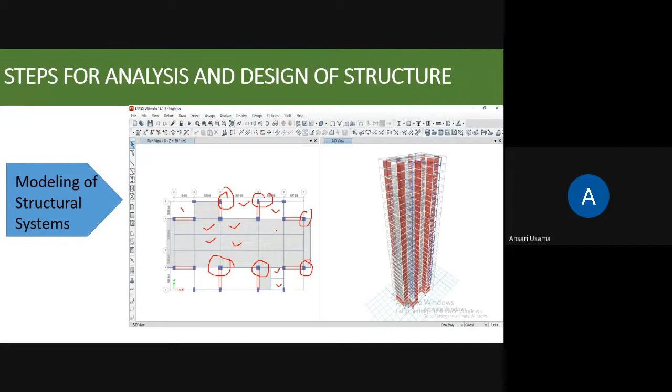So because that portion is open to the sky, we are not providing the slab over here. So this is how we have to prepare the model first of all. After the preparation of the model, the next step is we have to define the material property, which material we are going to use.

Since here we are going to learn about the design of RCC structures, we have to define two materials: one is concrete and another is steel. You might know that different grades of steel are available, Fe415, Fe500 and Fe250 as per Indian Standard Code. So we have to define the material. This kind of window will open when we go for the material property data.

You have to define the material, like concrete, what grade of concrete we want to use for the design of a structure, and similarly we have to define the steel grade, which grade of steel we want to use for the design of a structure. That is how we define the material property.

After defining the material property, we have to define the preliminary size of the sections, what will be the size of the column and what size of beam we can provide for a building or structure. So it is a preliminary size. It is not a final size.

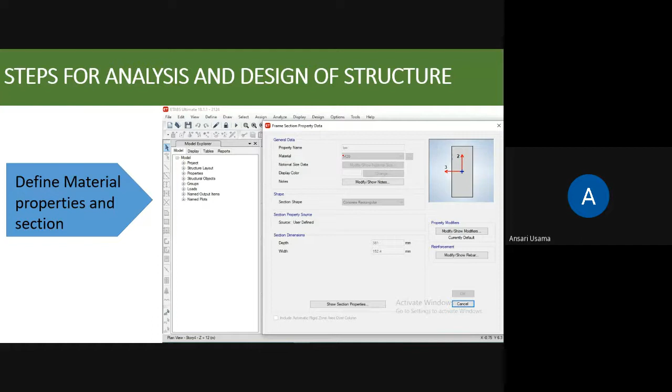After defining the material properties and sections, we have to define the support. Generally, we provide a fixed support, but if we are doing the analysis of a steel structure or a truss geometry, we have to define the support as a pin joint, or hinge or roller supports. But when we are designing an RCC building, we treat supports as fixed, rigid supports.

So we'll define the support and then go for the analysis. Before the analysis, we have to apply the load on each and every member. For example, on a beam element there are wall loads. Similarly, the slab load will transfer by defining the slab, so it is already there.

So we have to define the live load over the slab panel and the wall load on the beam element, various kinds of load. If we want to do the analysis for wind loading, we have to define the wind load. And if we want an earthquake resistant design of a structure, we have to define the earthquake loading also. So different loads are defined under the head of loading.

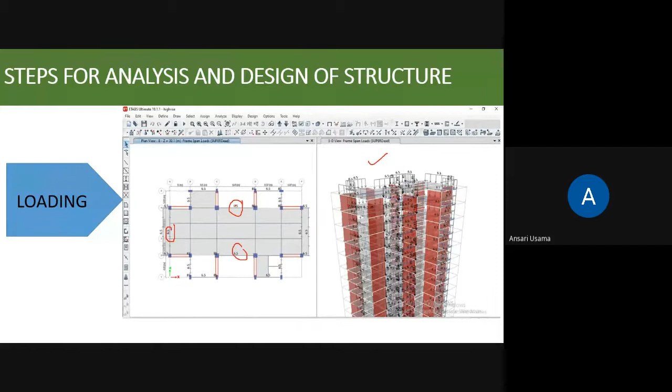Once we apply all the loads coming over this structure, one more load we have to define here is the self-weight. This software directly takes the dead load, but in the case of STAAD Pro, you have to assign the dead load also. Here, the software will directly take the dead load, the self-weight of the structure. After the loading step is completed, we go for the analysis.

You might have studied different methods of analysis in your analysis subject, like moment distribution method, flexibility method, stiffness matrix method, slope deflection method. Here the software will do the analysis on its own, and mostly these softwares work on the stiffness matrix method. Almost all the design softwares work on the stiffness matrix method.

So here you don't have to do any kind of analysis. The software will do the analysis. You just have to click on the run analysis button, and your software will do the analysis. And what do we want from the analysis? What output do we want from the design point of view?

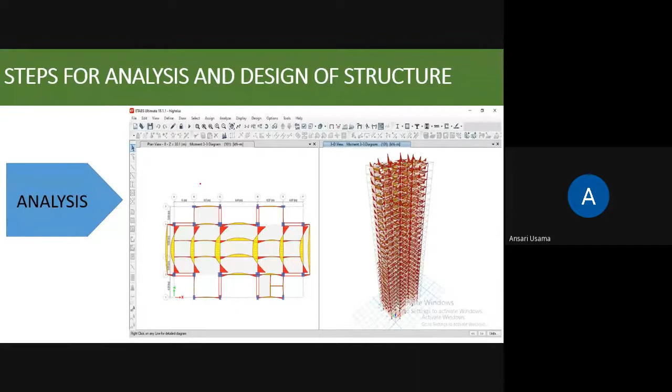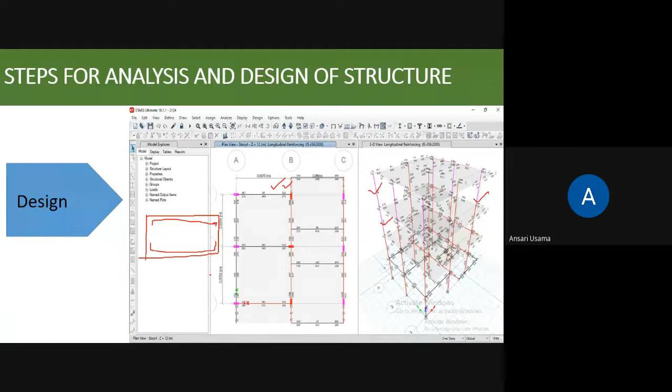So this is all about the brief introduction of the ETABS software, how we can do the analysis and design of any structure, starting from the modeling till the design, the various steps. Okay, so this is just a brief introduction about the ETABS software. Now we'll see how we can run the ETABS software and what the icons of the different versions of ETABS look like.

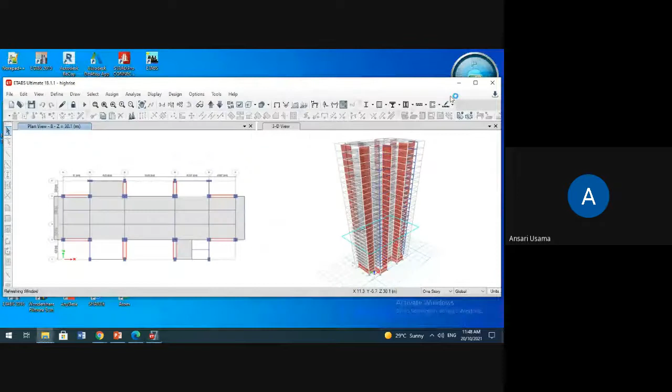So the desktop window is visible to you. As we have discussed, different versions of ETABS software are available in the market. You can take any one of them. There is some change in each and every version. Similarly, the icon symbol also changes from version to version.

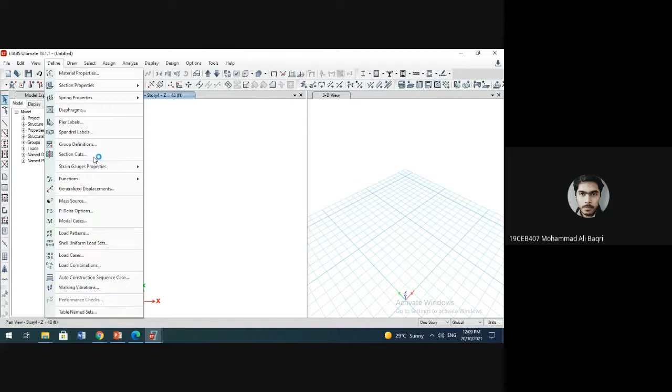See that so many sections are available under this window. Similarly, when we see the loading, load cases, the various load cases are available from the last project that you have done. The various load combinations are there.

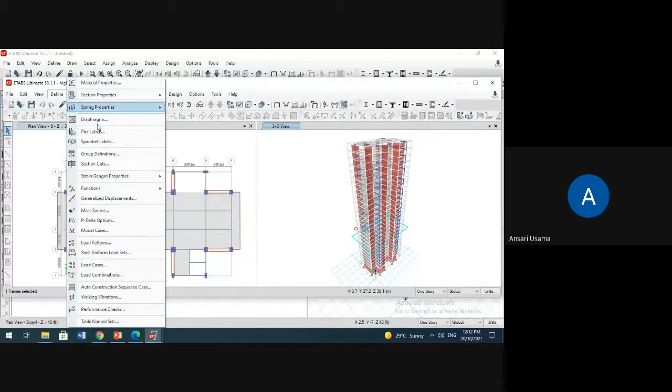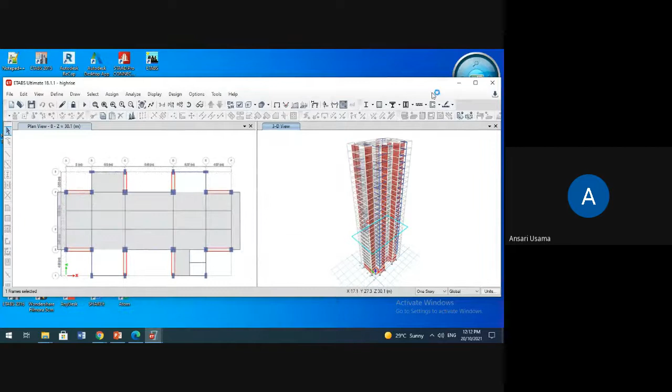लोड कॉम्बिनेशन जो हम लोगों ने यहाँ डिफाइन किया है, so you can see that more than 100 load cases we have defined over here. So all those load cases will be coming to our new project which we are going to model. So this is one of the advantages of this icon, that is use default setting.

So this is the first option. Next option है use setting from a model file.

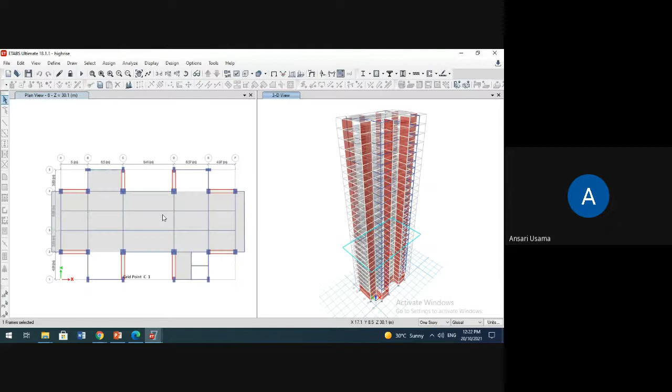So there are three ways to prepare a model. We can build a model in 3 ways. The first one is OPM method, object point method, and second is grid system, which is the window currently open that you're seeing. And the third option is the export-import method.

We have to prepare a model. Whatever architectural plan you have, you need to make a model of that architectural plan. So we can prepare that model with the help of 3 options: one is OPM, object point method, grid system, and the third one is export-import method.

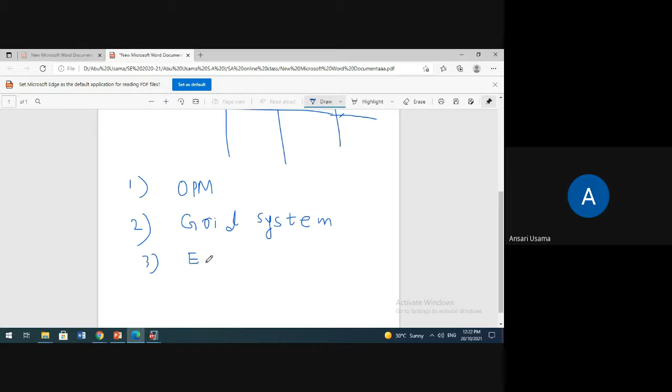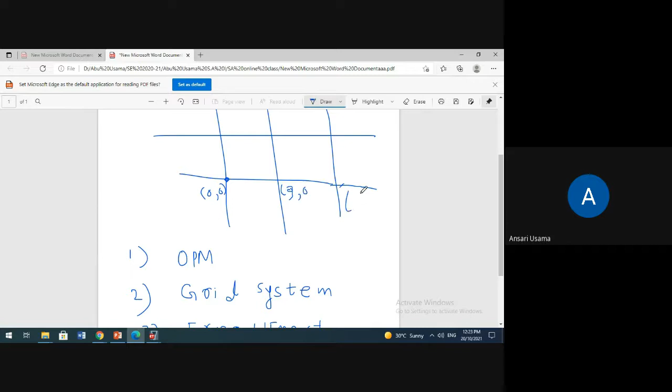In object point method, we'll plot various points by knowing their coordinates. Everyone knows about coordinates. We have to select origin - suppose this is an origin having coordinate 0,0. Then this is at a coordinate of 3,0, this is 6,0. Like that, if we know the coordinate of each and every point, we can plot that point with the help of object point method. But this method has nowadays become very obsolete - we are not using this method, it takes much amount of time.

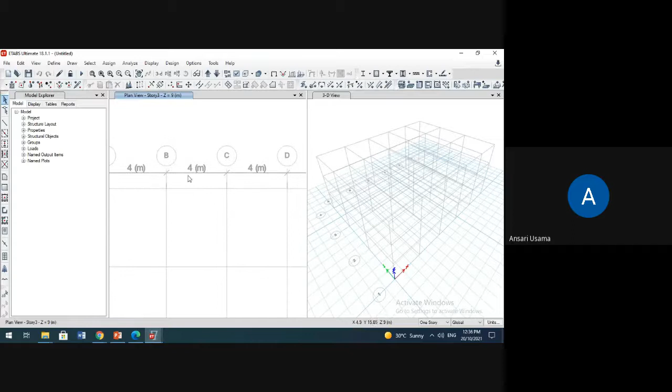तो इस तरह से 2 विंडो ओपन होता है। इस तरह से हम लोगों ने ग्रिड फॉर्म कर लिया। X direction में देखिए 1 2 3 4 5 6 ग्रिड लाइन हमने mention किया था, और कॉमन स्पेसिंग 4 मीटर डिफाइन किया था - वो आप यहाँ देख सकते हो। Y direction में 5 मीटर का स्पेसिंग हमने डिफाइन किया।

और देखिए यहाँ जो नंबरिंग सिस्टम आता है, reference line का नंबरिंग आता है। You can see that in X direction, जो स्पेसिंग define किया है वो अल्फाबेटिकल ऑर्डर में दिया है - A B C D E, इस तरह। This is just for reference - grid line A, grid line B, grid line C, like that। जब हम grid line बढ़ाएंगे, आगे अल्फाबेटिकल ऑर्डर में नंबरिंग आएगा।

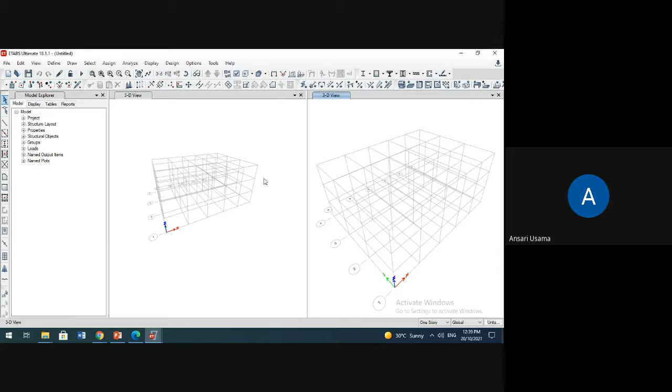So again, these are on both the window. You can observe that both are in 3D. So it is also possible you can keep the same thing on both the window, either plan or either elevation or 3D. So यहाँ पे हम लोग 3D और प्लान पे रख सकते हैं.

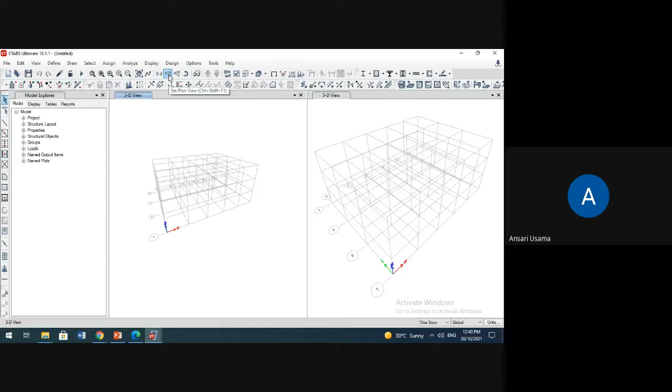सो व्हेन वी क्लिक ऑन स्टोरी 1, व्हेन वी से अप्लाई, देन ओके, so we will obtain the plan at first story. So whenever we are working over the plan, so it's very important on which floor we are there. हम लोग कौन से फ्लोर पे हैं आपको मालूम होना चाहिए. We are at story 1, story 2 or story 3, that we should know.

So how we can come to know? It is mentioned over this title. आप यहाँ देख लीजिए, यहाँ टाइटल लिखा है plan view. This is written over here. This is plan view dash story 1. So we are at the story 1.

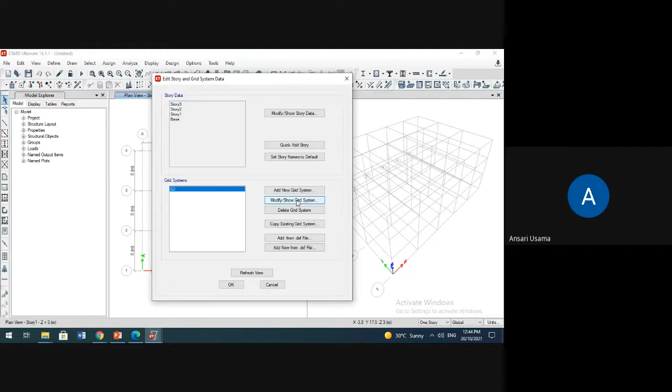So through that window we can add the number of grid or we can delete the number of grid. So x and y coordinate आपको मिलेगा। When we click on that window, we will see the x and y grid system. Suppose if we want to delete, अगर हम लोगों को डिलीट कर देना है तो देखिए हम लोग डिलीट कर सकते हैं।

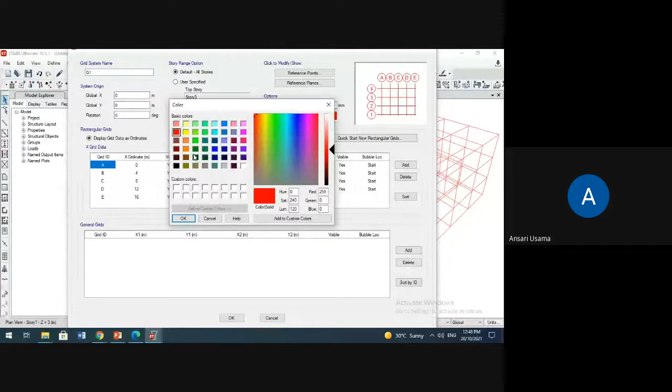So this is how we can draw the grid system when it is uniform. But most of the time the grids are not uniform, your column spacing are different, the columns are not placed at equal interval. So we are having the non-uniform spacing. So we can even make a non-uniform spacing also. Non-uniform spacing भी हम लोग बना सकते हैं.

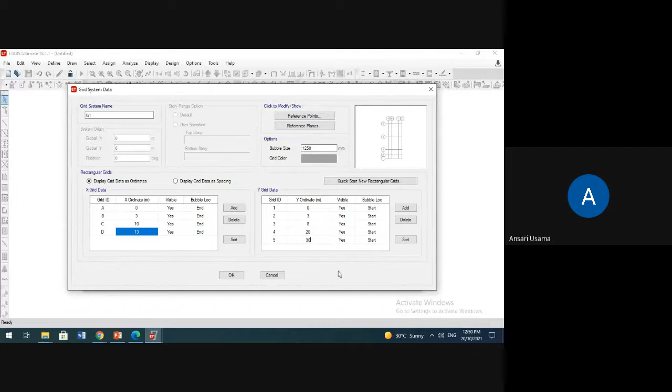So we can make a non-uniform spacing also. Similarly, in case of y coordinate, let us say this is for 3 meter. Then next coordinate at next line at 8 meter. Then next at 20 meter. Then next as 30 meter. When we click over there, okay. So we'll get the non-uniform spacing.

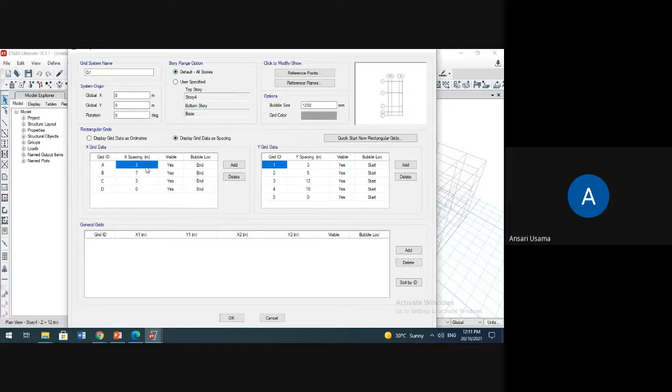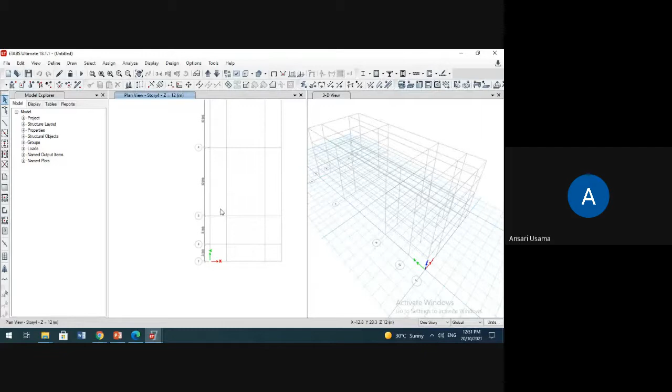And here we'll provide 5 meter, 5 meter, 5 meter and 5 meter. Then say okay. So see that this is the grid that has been prepared. We have mentioned equal spacing in both the directions. So such kind of edit you can do even after clicking that system of grid. Just go into the edit, modify, and we can change the spacing.

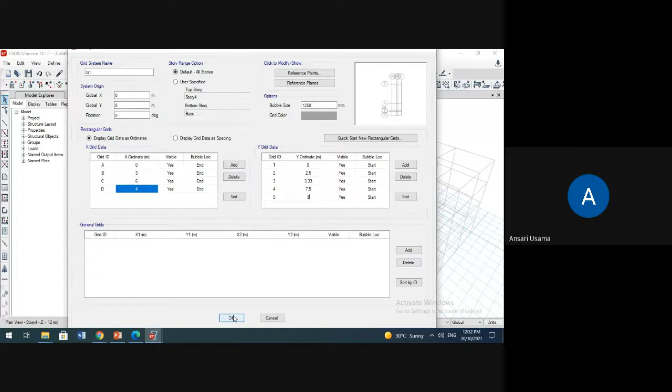Let us do some non-uniform spacing, 3 meter. Then the spacing to the next is 6 meter. Then next spacing will be at 4 meter. And here we'll say this is 2.5. है ना, पॉइंट में भी हो सकता है. This is 3.33 meter. And this is, let us say, 7.5 meter. And now this is at 3 meter. Now say okay. So this is how our grid has been changed.

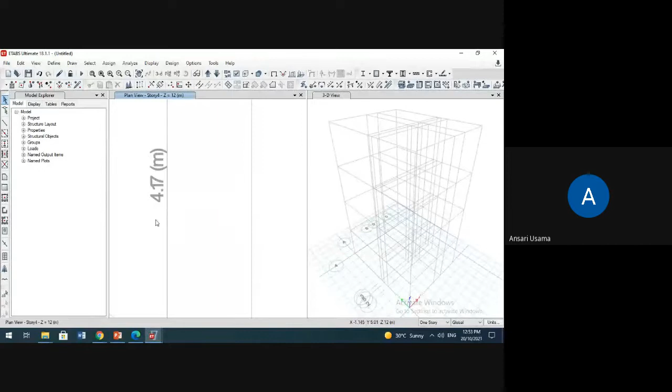So we can reduce the bubble size. Bubble size को हम लोग यहाँ पे reduce कर सकते हैं. So this is how we have observed how to do the change in case of plan. Similarly आप story में भी change कर सकते हो. Just click over this icon and now we have to click over the modify story. ऊपर देखिए modify story है. So just click over the modify story. So when we click over the modify story, such kind of window will be open in front of you.

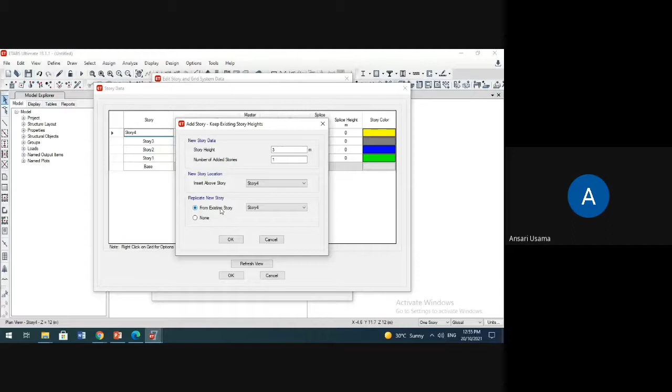So similarly, if you want to change the height of story, आपका जो फर्स्ट स्टोरी रहेगा that is ground level, plinth level 1.5 मीटर पे होता है. We can say this is 1.5 meter. Then we can change the story height also or at different level. Suppose second, third story is of 3 meter.

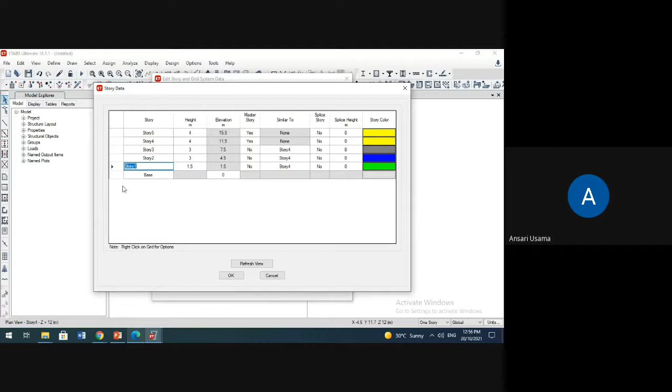So let us say it's okay. So just see that the height is going to change. 3D में आप देख लीजिए different stories are having different heights. First सब लोगों ने define किया 1.5. This will be at 1.5. Then 2 stories of 3 meter and then the top two stories of 4 meter.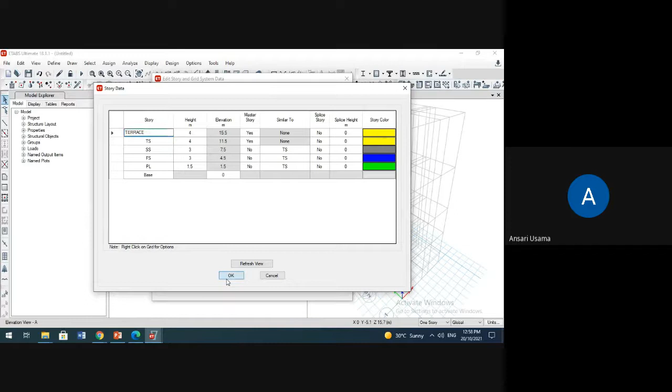Accordingly we can change. इसका नाम भी आप चेंज कर सकते हो। Let us say this is plinth level. शॉर्ट में लिखते हैं plinth, PL, plinth level. Then let us say this is first slab, FS. This is second slab. This is third slab. And this we can say terrace, or let us say fourth slab. फोर्थ छोड़ दीजिए, इसको टेरेस नाम दे देते हैं, टेरेस। So even we can change the nomenclature.

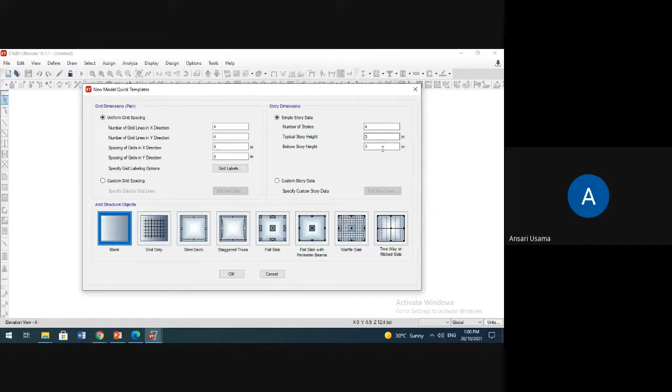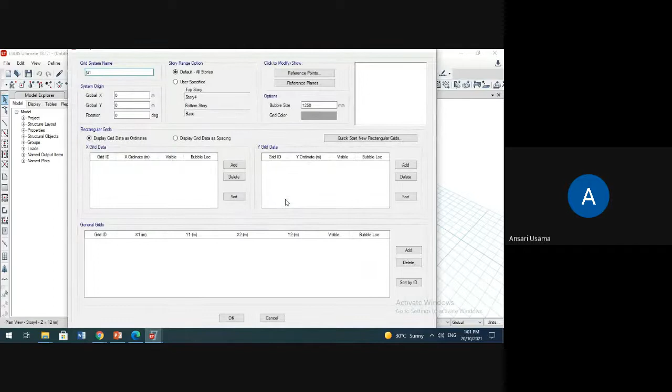So when we click over the blank, no grid line will be drawn over this window. यहाँ पे कोई grid line आपका mention नहीं रहेगा। So just go to the modify command, and then say modify grid system. Okay, we have to click over add new grid system. Just click over add new grid system. यहाँ देखिए एक नया grid system add हो जाएगा, उसके ऊपर आप क्लिक कीजिए। So this kind of window will open. So here we can change the grid system type.

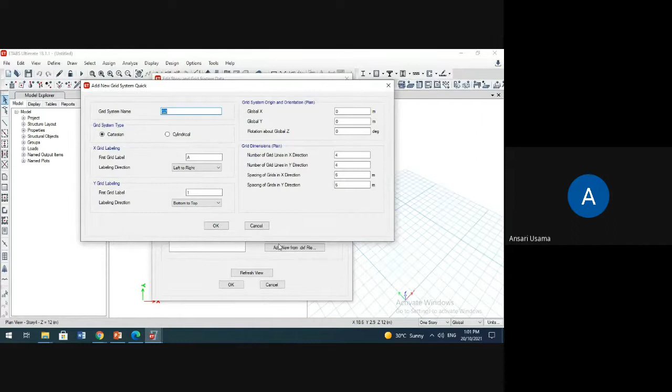Cartesian means ये x and y coordinate में जो भी हम लोगों ने discussion किया। When we click over the cylindrical coordinate, तो आपको सर्कल में मिल जाएगा।

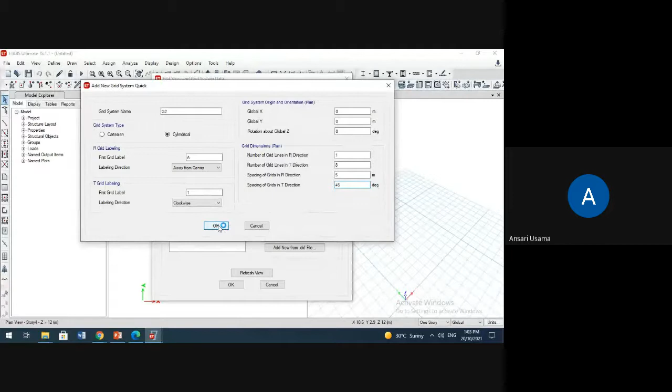And we have to divide into 360. 360 में आपको डिवाइड करना है. So 360 डिवाइड बाय 8 कर लीजिए तो आपको एक एंगल बिटवीन मिल जाएगा ग्रिड लाइन, that is 45. Then okay.

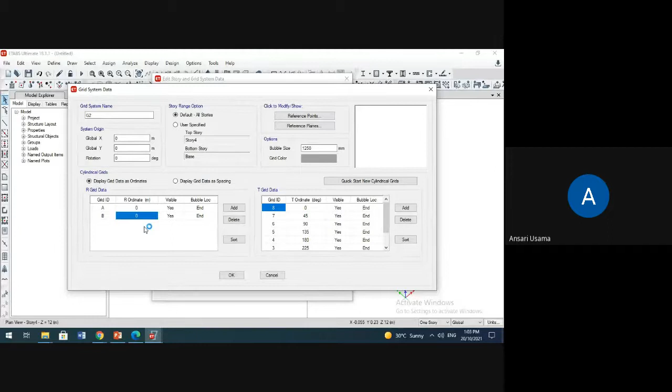Okay, just we have to modify. We have to add one more grid line in radial direction because the first grid line is at origin. Let us say this radius is 5 meter. So this is how we are obtaining that grid line.

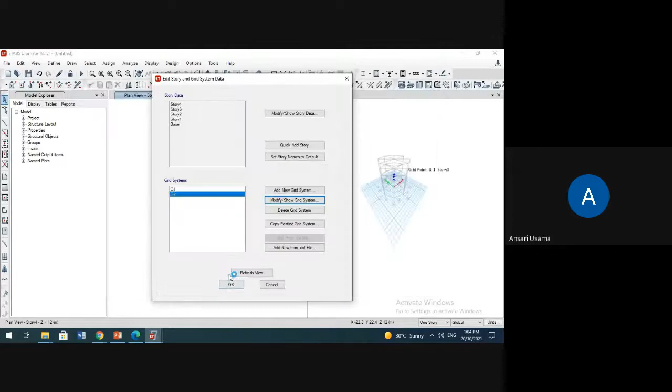So such kind of grid system we have to prepare for modeling of a water tank. वाटर टैंक आपको मॉडलिंग करना है तो इस तरह से सिलेंड्रिकल कोऑर्डिनेट सिस्टम आपको यूज करना रहेगा. It is not a point of discussion, but we are discussing the grid system, so that's why we have discussed it here.

So this is how we can get the tower of the water tank. इसके ऊपर फिर आपको water tank का बॉडी बनाना है. Side wall we have to construct and then we do the modeling of the water tank. These are the tower for an overhead water tank. So at these junction coordinate points we can provide the columns.

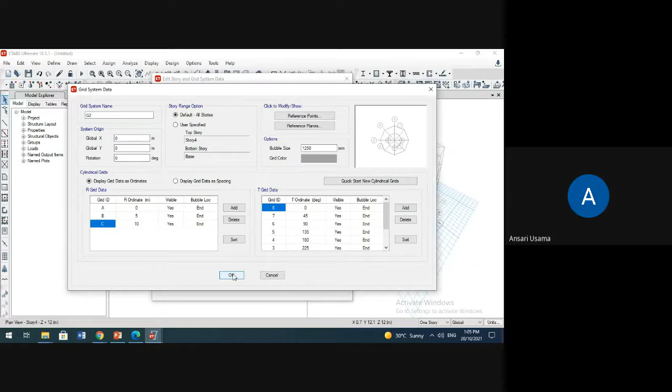इस तरह से डबल रिंग तो नहीं आता है, but sometimes we may provide the double ring when the diameter of the water tank is more. So we have to make two grids like that. So this we use for making a water tank. So this is all the discussion about the grid system, coordinate system, x and y, and these coordinate systems.